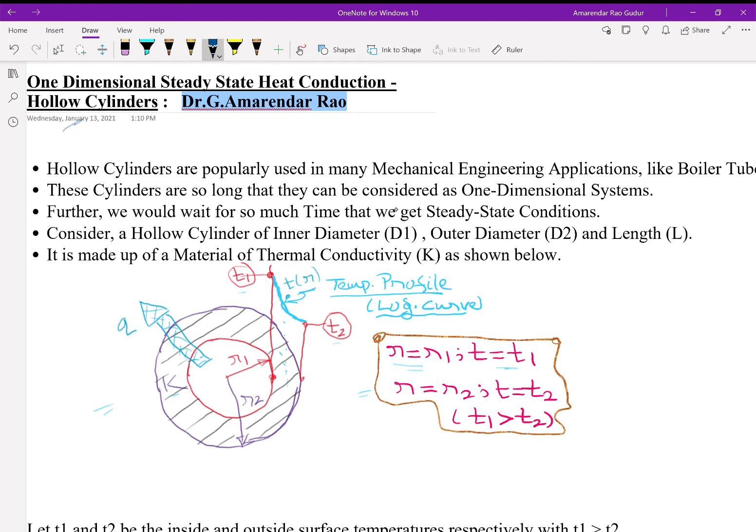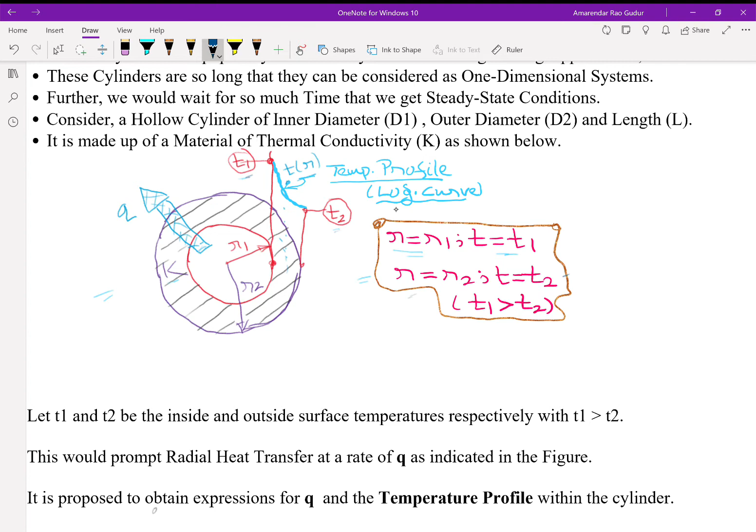Then, in order to have the heat transfer, we assume that the inner surface is maintained at some temperature T1, while the outer one is at some temperature T2, with T1 greater than T2. Mathematically, at R equal to R1, T is equal to T1. At R equal to R2, T is equal to T2, with T1 greater than T2.

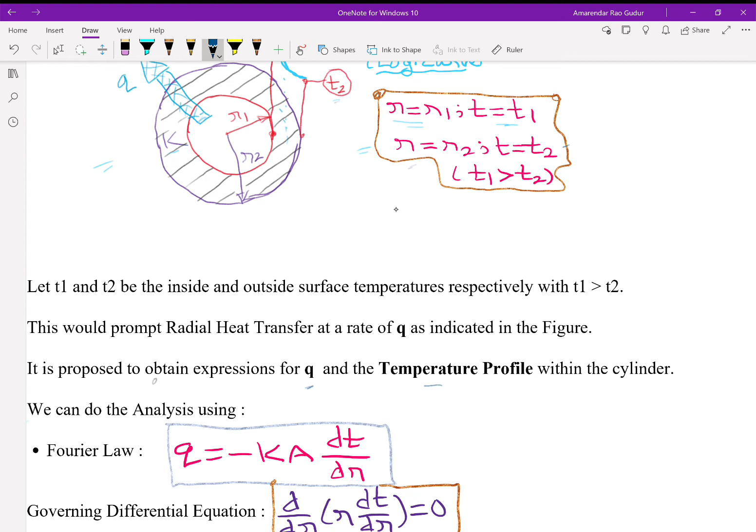Now we intend to get the expressions for heat transfer rate and the temperature profile within the cylinder, and we can carry out the analysis by two popular methods. Method one is we adopt the Fourier law, which for a radial system is given by Q equals minus KA dt by dr.

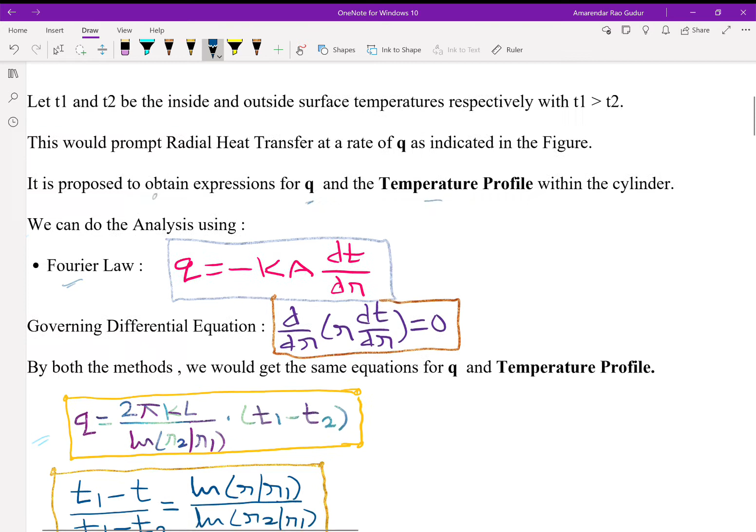Or we can pick up the governing differential equation for cylinders, which becomes d by dr of r dt by dr equal to 0. By both these methods, we get similar expressions for both heat transfer rate and temperature distribution. We realize that the heat transfer rate is given by 2 pi kL over log R2 by R1, times T1 minus T2.

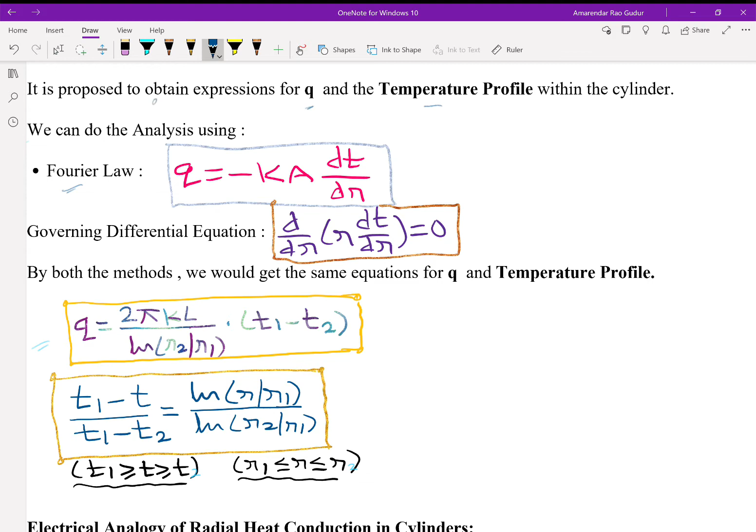And the temperature profile is given by T1 minus T by T1 minus T2 equals natural logarithm of R by R1 divided by natural logarithm of R2 by R1. We notice that on the left hand side T1 is highest and T2 is lowest, whereas on the right hand side R1 is lowest and R2 is highest. Both these equations give us the required output of heat transfer rate and temperature distribution.

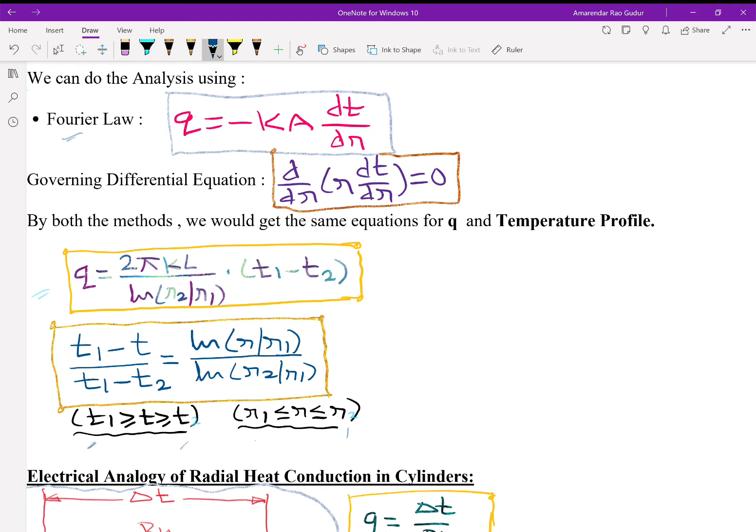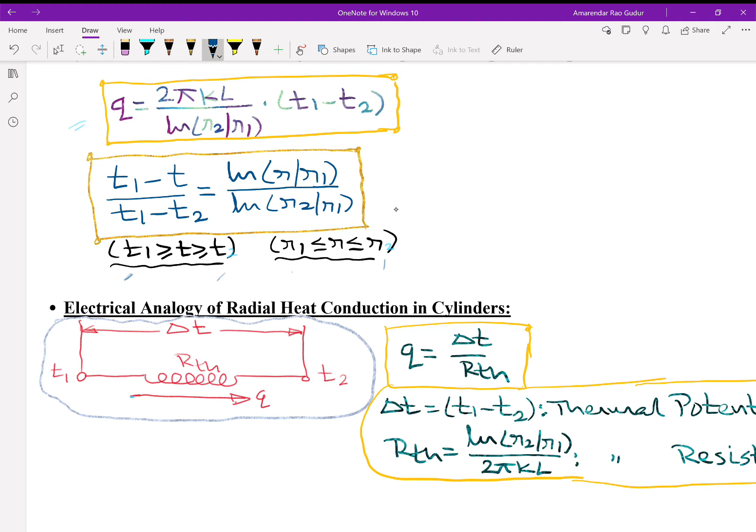Now we can carry out the analysis using the powerful electrical analogy, wherein the given hollow cylinder is replaced by an analog circuit with left side at T1 high potential, right side at T2 low potential, and the difference between T1 and T2 we call thermal potential, responsible for the heat transfer. The heat transfer rate is hampered by thermal resistance RTH, and Q equals delta T by RTH as per Ohm's law.

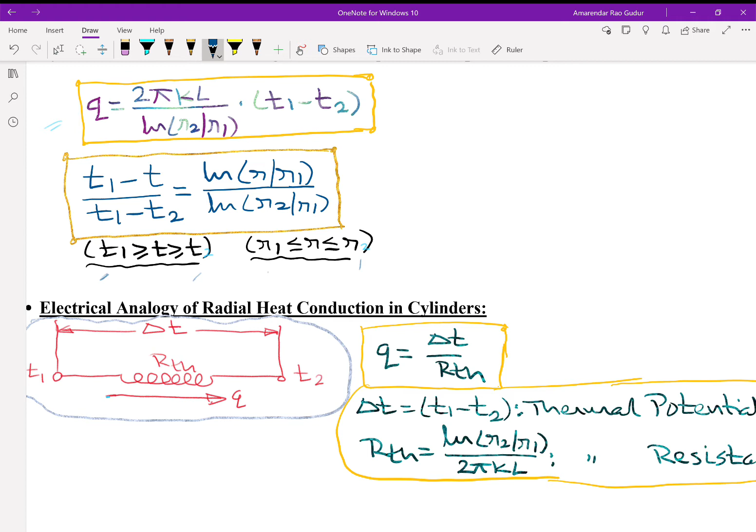By looking at this equation and the conventional equation, we realize that thermal resistance is given by log R2 by R1, divided by 2 pi KL. And whenever length is not given, we take it as 1 meter.

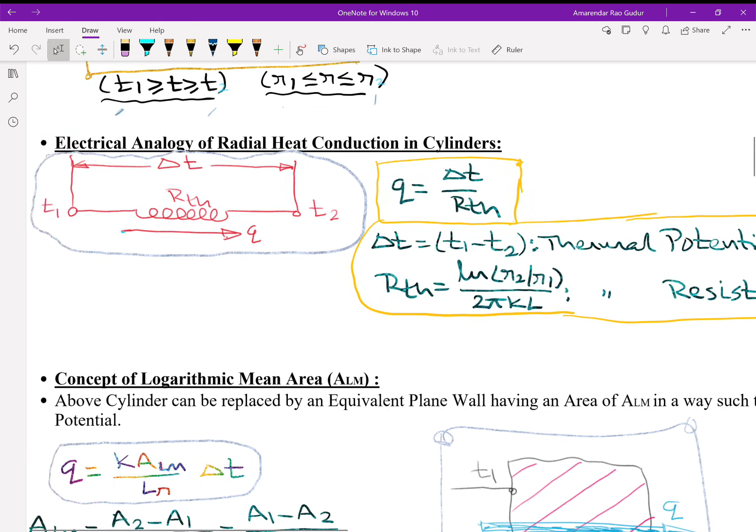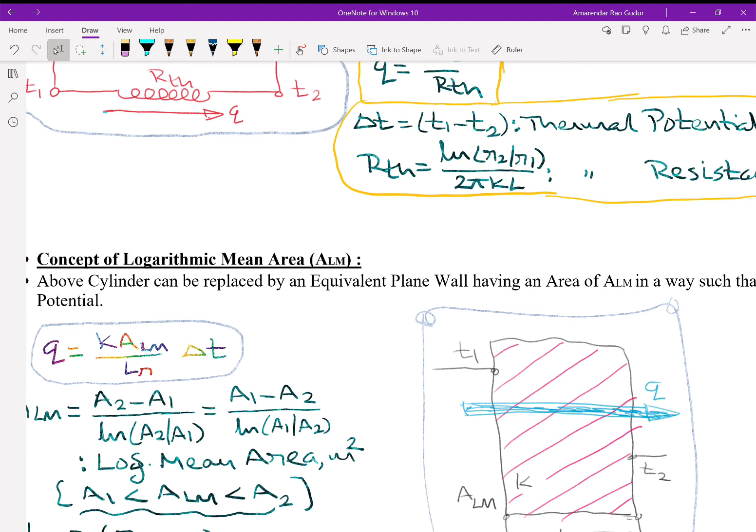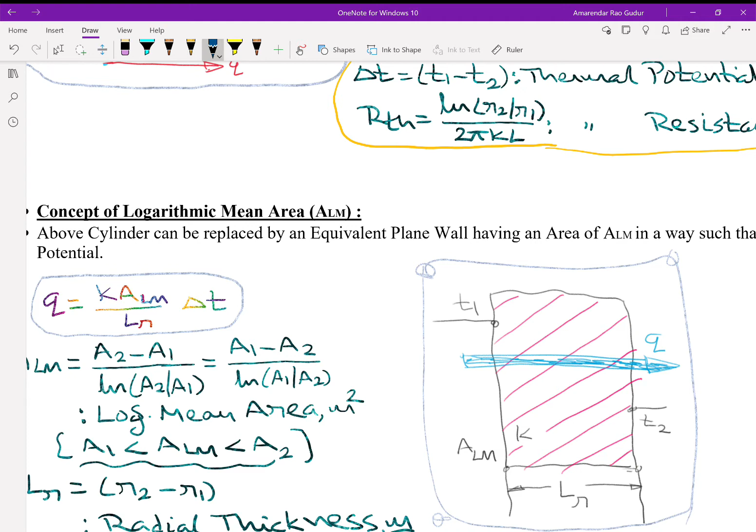Since the cylinder has various areas, inside area is A1 equal to 2 pi R1L, outside area is A2 equal to 2 pi R2L, we can think about something called logarithmic mean area, ALM. In this concept, the cylinder is replaced by an equivalent plane wall having an area of ALM normal to the direction of heat transfer.

Remaining things are same material, same potential, same heat transfer rate. The cylinder thickness is represented by LR, which we call the radial thickness in meters. We can write the expression for Q in a similar way as that of a plane wall. We know that in a plane wall, Q is given by KA by L, times delta T.

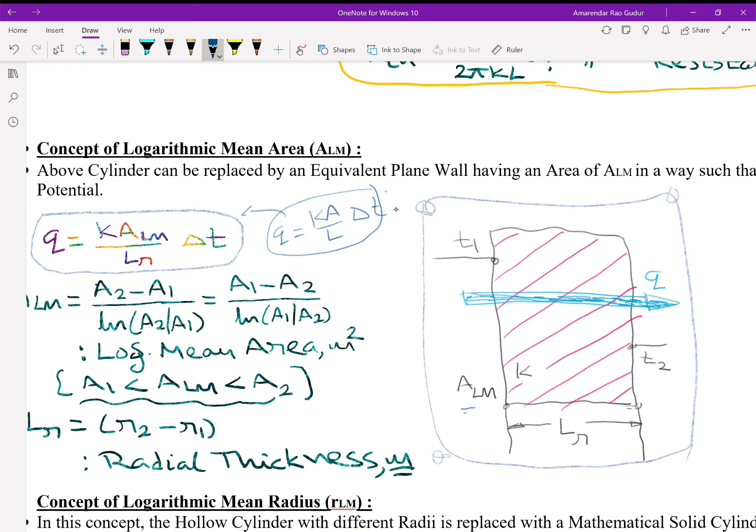The analogous equation we write, only the change is that A is replaced by ALM and L is replaced by LR. By a simple mathematical procedure, we can show that this logarithmic mean area is given by A2 minus A1 over log A2 by A1, or A1 minus A2 over log A1 by A2.

Both equations are perfectly correct. If you use the first part of the equation, A2 is greater than A1, so the numerator is positive, and A2 by A1 is greater than 1. Log of anything greater than 1 is positive, so positive by positive you get a positive mean area.

If you use the second part of the equation, A1 is less than A2, so A1 minus A2 is negative, and A1 by A2 is less than 1. Log of anything less than 1 is negative, so negative by negative is positive. Again we are comfortable, so you can say one area minus the other area, divided by log of first area by second area.

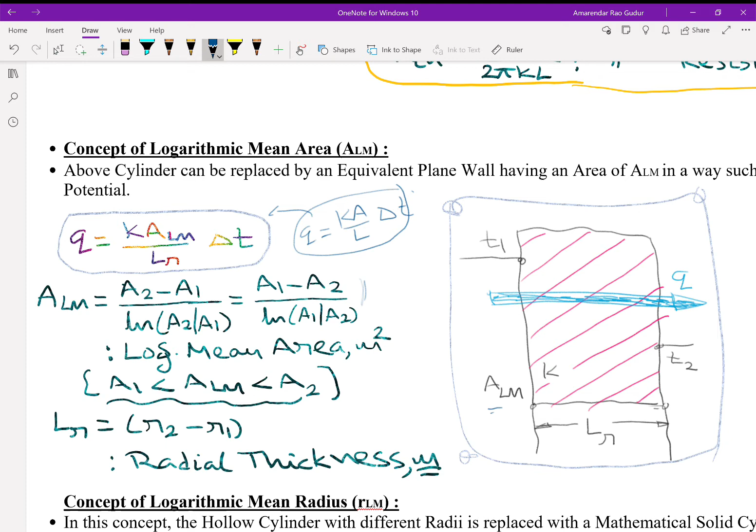Then we can always show that log mean area will be more than A1, less than A2. LR, as I was telling, is R2 minus R1, the radial thickness. So this log mean area concept enables us to write the expression for heat transfer rate analogous to that of a plane wall.

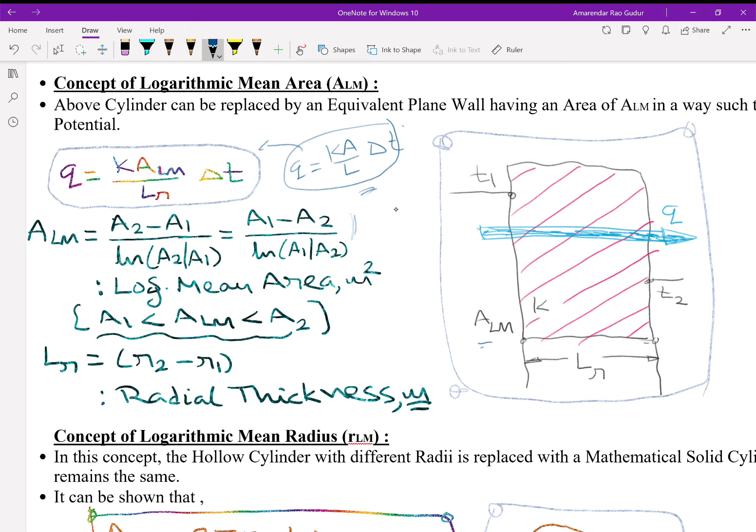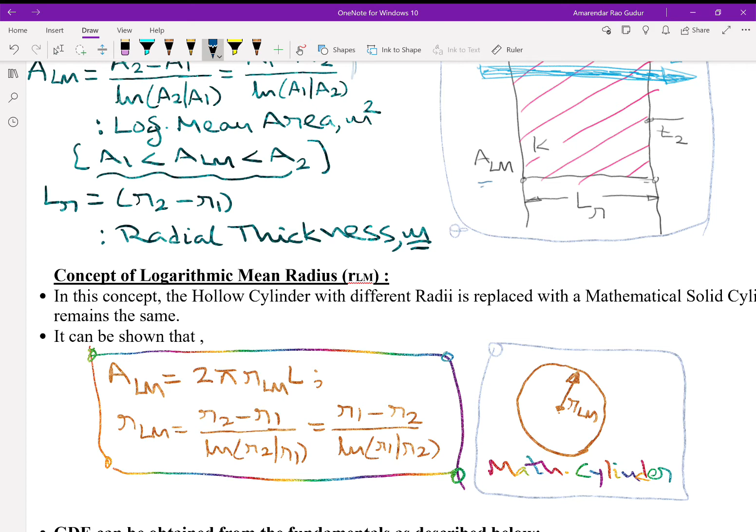Then we can always think about the concept of log mean radius, RLM. In this concept, the hollow cylinder with different radii will be replaced by a mathematical solid cylinder having the radius RLM, in a way such that everything remains the same. This is the mathematical cylinder having a radius of RLM.

Then we can write ALM, log mean area, as 2 pi RLM L, where RLM is simply R2 minus R1 by log of R2 by R1, or R1 minus R2 by log of R1 by R2. And we can always show that R1 is less than RLM, which is less than R2. So it's the mean of R1 and R2.

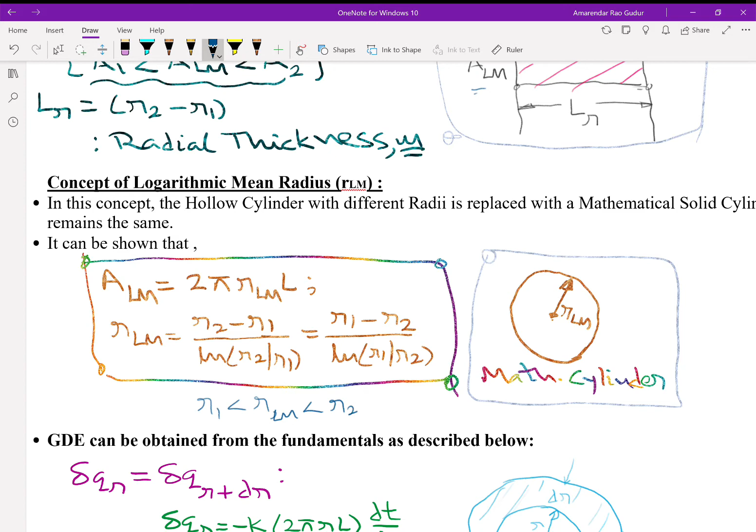Then we can carry out the analysis using the governing differential equation, obtained from the fundamentals, wherein we consider a cylindrical strip at any radius r having thickness dr. Del qr is the rate of energy coming in, and del qr plus dr is the rate of energy going out. For this strip to be in steady state, energy coming in should equal energy going out, the energy balance equation.

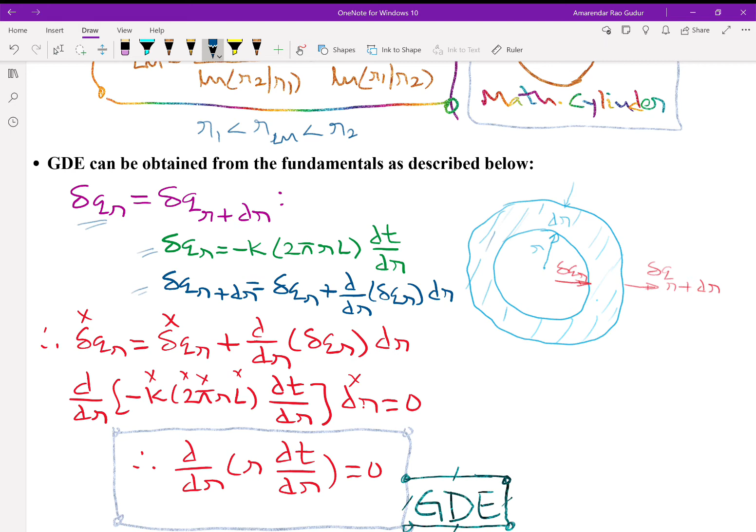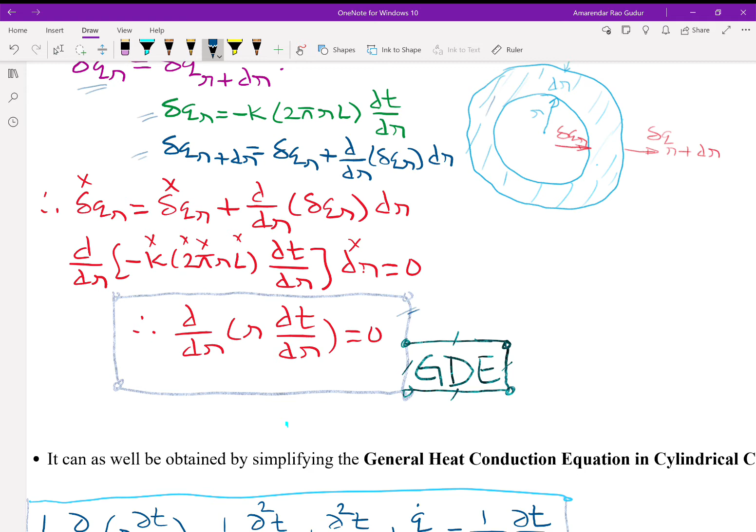Energy coming in can be found using Fourier's law. Energy going out can be written in terms of energy coming in using Taylor series. When we combine both these equations, we get the necessary governing differential equation, which can be integrated twice with appropriate boundary conditions to get the temperature distribution, followed by the heat transfer rate.

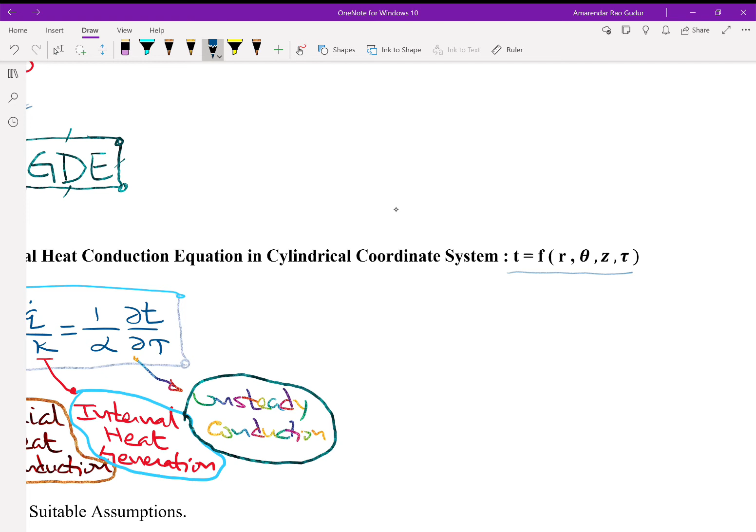The governing differential equation can also be obtained by simplifying the general heat conduction equation in a cylindrical coordinate system, wherein temperature is a function of r, theta, z and tau, where r is the radial coordinate, theta is the angular coordinate, z is the axial coordinate and tau is the time.

We will derive this equation in the forthcoming sessions. The general heat conduction equation in a cylindrical system, for a material that is isotropic and homogeneous, is given by 1 by r del by del r of r del t by del r, plus 1 by r square del square t by del theta square, plus del square t by del z square, plus q dot by k, equal to 1 by alpha del t by del tau.

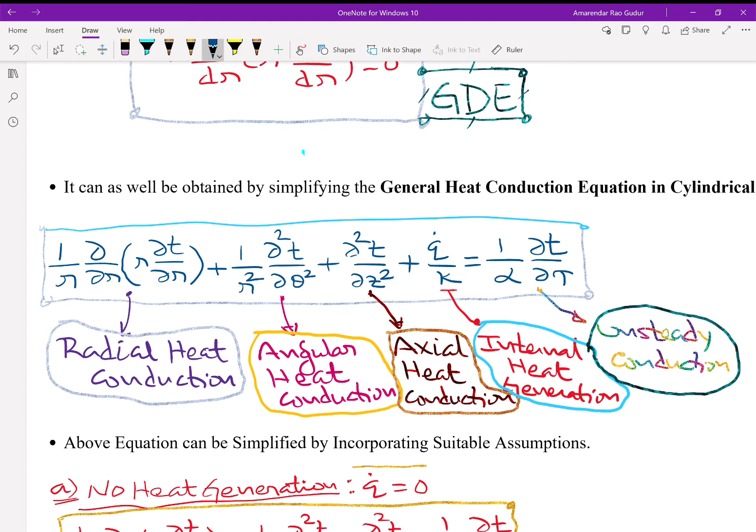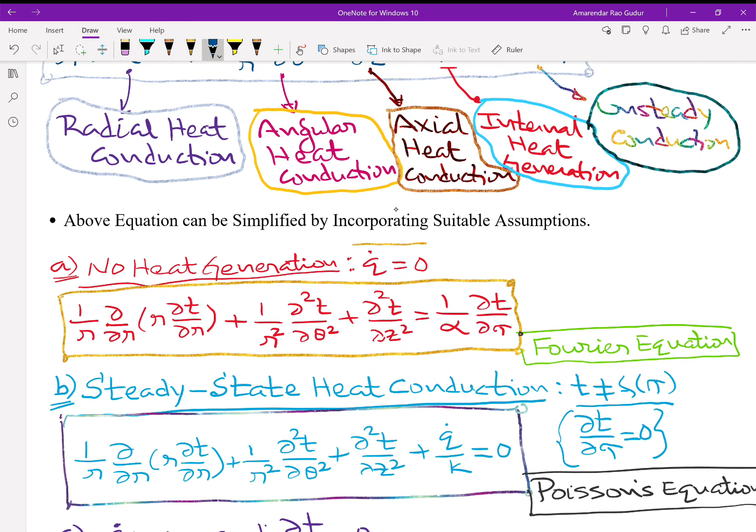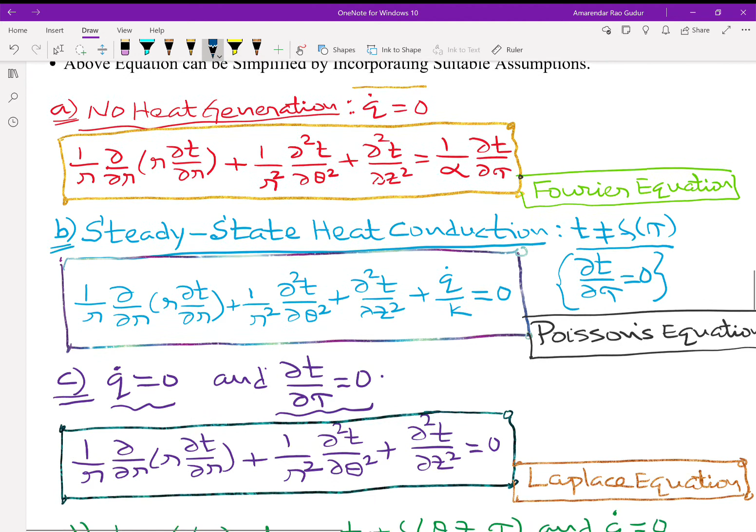We can simplify this equation with suitable assumptions. If there is no heat generation, the fourth term vanishes, giving us the equation named after Fourier. If it's steady state heat transfer, the RHS is zero, giving the Poisson's equation. Combining both conditions, no heat generation and steady state, the first three terms equal zero, giving the Laplace equation.

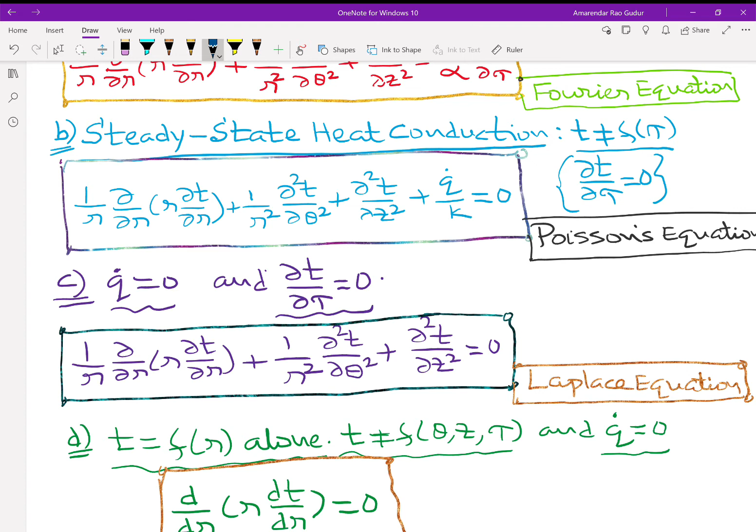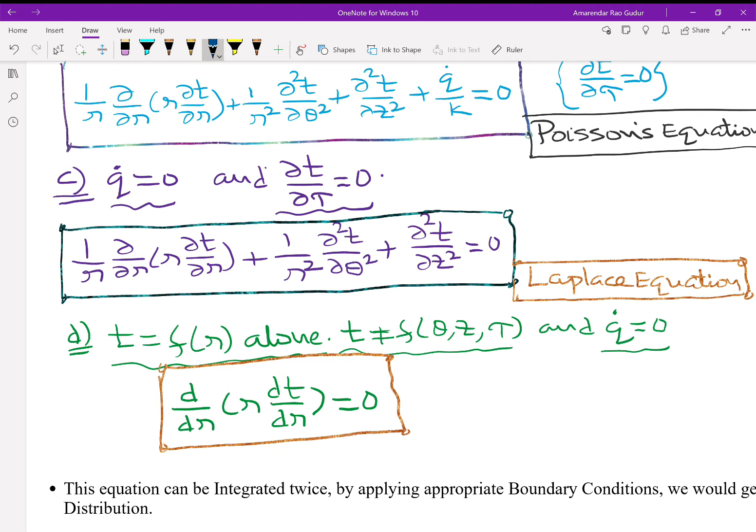Since temperature is a function of R alone, del can be replaced by d: d by dr of r dt by dr equals zero. This is the same as the governing differential equation obtained from the basics, and this equation can be integrated twice to get the temperature distribution followed by the heat transfer rate.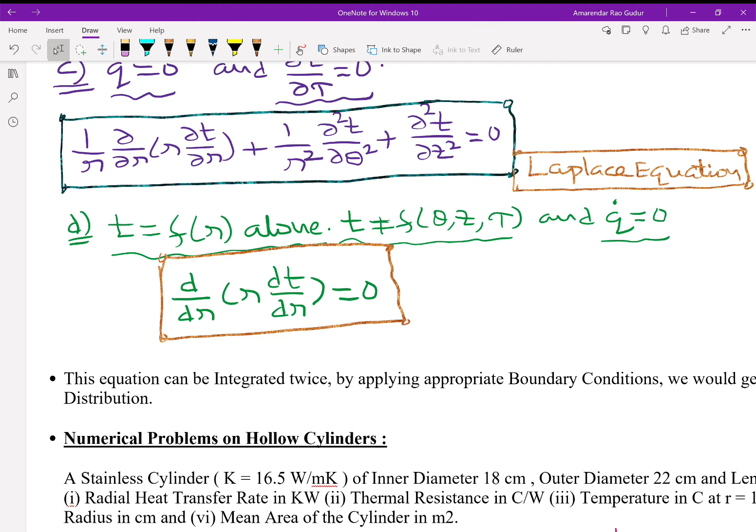These are all some of the important concepts related to hollow cylinders. Now let's try to pick up some numericals. The first one is a very general problem involving all the calculations.

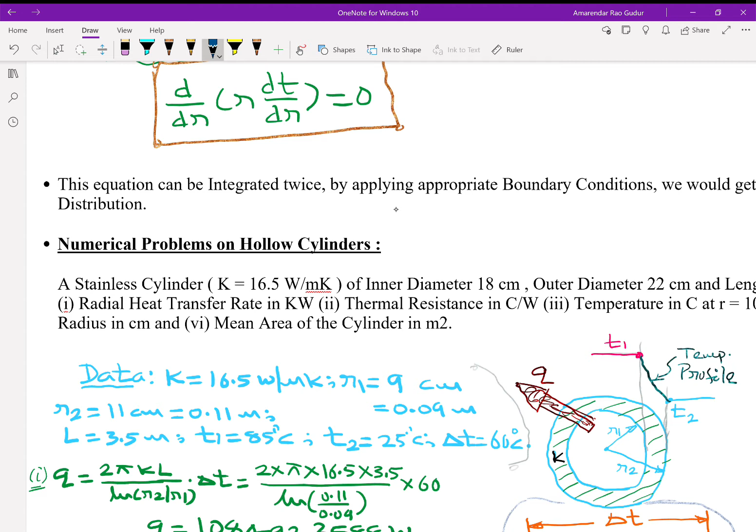A stainless steel cylinder, K equal to 16.5 watts per meter Kelvin, of inner diameter 18 centimeters, outer diameter 22 centimeters, and length 3.5 meters, has its inner surface at 85 degrees centigrade and outer surface at 25 degrees centigrade.

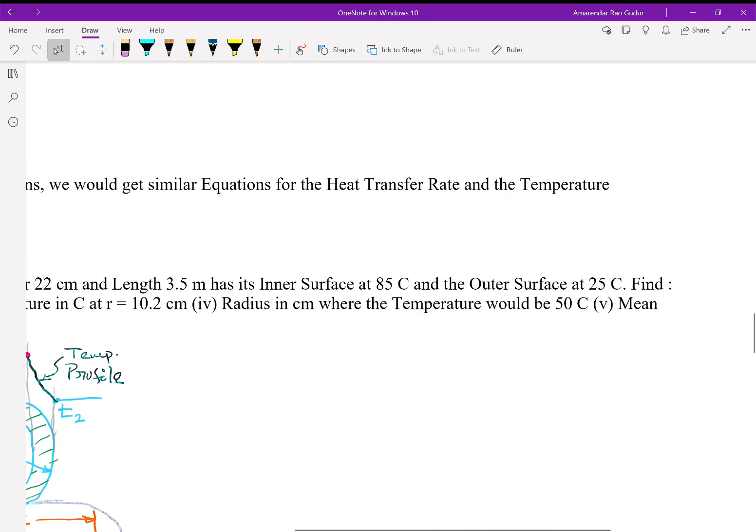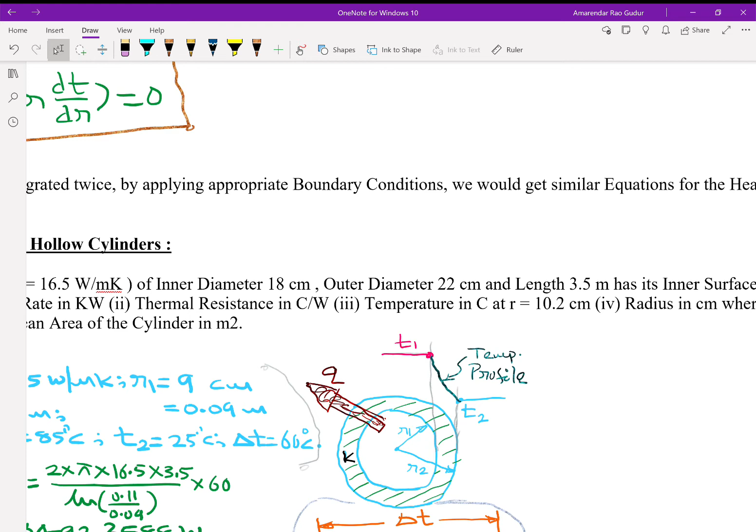Find number 1, the radial heat transfer rate in kilowatts; number 2, thermal resistance in degrees centigrade per watt; number 3, temperature in degrees centigrade at R equal to 10.2 centimeters; number 4, radius in centimeters where the temperature would be 50 degrees centigrade; number 5, mean radius of the cylinder in centimeters; and last one, mean area of the cylinder in meters square.

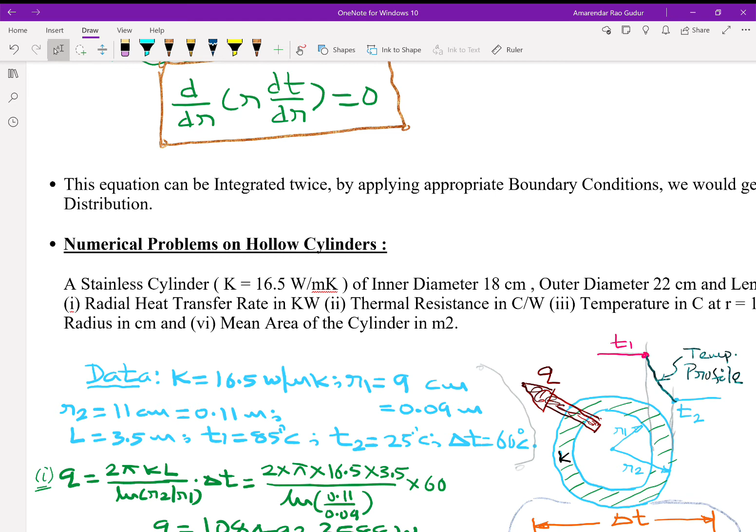If you jot down the data, for stainless steel K is 16.5, already given. Then we have inner radius 9 centimeters, diameter by 2 by 100, that's 0.09 meters. Outer radius is outer diameter by 2, 11 centimeters divided by 100, 0.11 meters. Length is 3.5 meters. Inner surface temperature 85, outer surface temperature 25. Take the difference, it's going to be 60. There is a thermal potential, and this diagram illustrates the entire data available to us.

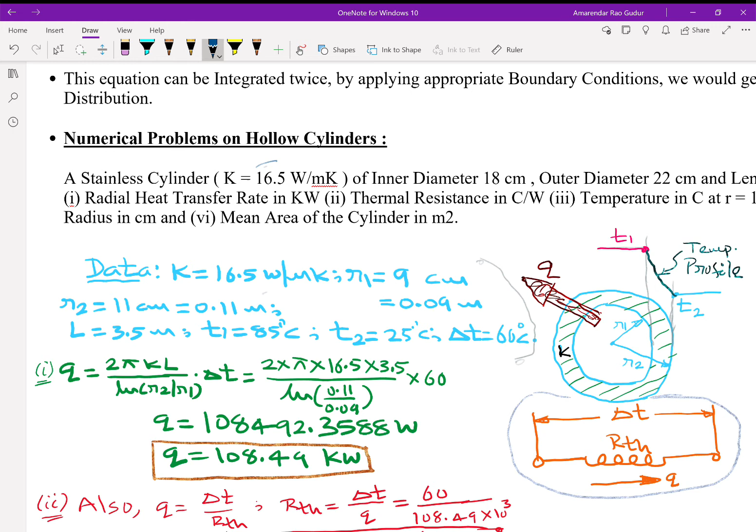Then we have the formula for Q: it is 2 pi K L by log R2 by R1 into delta T. If you substitute the entire data over here, we are going to get Q as 1,08,492.3588 watts. If we divide by 1000, 108.49 kilowatts.

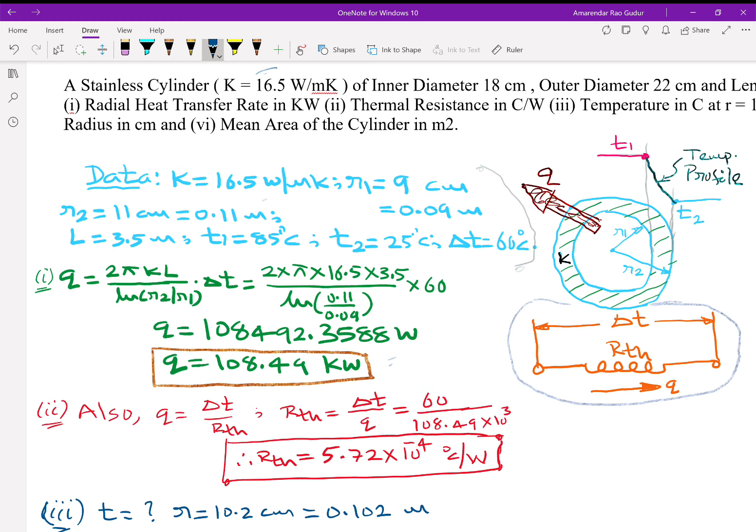Then also we can write Q as delta T by RTH. Q is available, delta T is available. You can find RTH as delta T by Q, which is going to be 5.72 into 10 power minus 4 degrees centigrade per watt. Then we can find temperature at the given location of 10.2 centimeters.

It's 0.102 meters. By using the formula of temperature distribution, T1, T2 are given, R1, R2 are given, R is given, you are trying to find T, which is going to be 47.57 degrees centigrade.

And we would like to look at the place where temperature is 50 degrees centigrade. Using the same equation, we have to find R, T is given, which is going to be 10.117 centimeters.

Then RLM as per the formula is R2 minus R1 by log R2 by R1. If you calculate, it's going to be 0.0996 meters. Into 100, it's going to be 9.96 centimeters.

That's the mean radius. Mean area is A2 minus A1 by log A2 by A1, or A1 minus A2 by log A1 by A2, or 2 pi RLM L. All of them are okay. Since RLM is available, this formula would be more effective, and if you substitute for RLM, L is given, it's going to be 2.19 square meters.

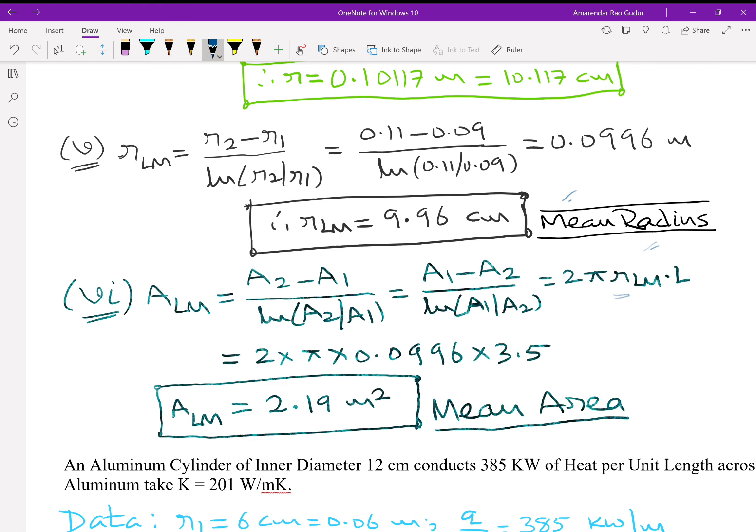So this is a general problem involving all the basic calculations.

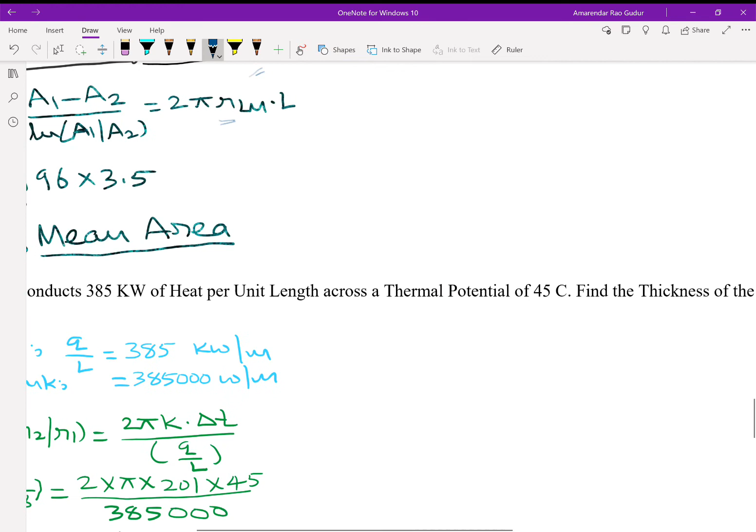Next problem is a one-step problem, wherein we have an aluminum cylinder of inner diameter 12 centimeters, conducts 385 kilowatts of heat per unit length across a thermal potential of 45 degrees centigrade. Find the thickness of the cylinder in millimeters. For aluminum, we can take K as 201.

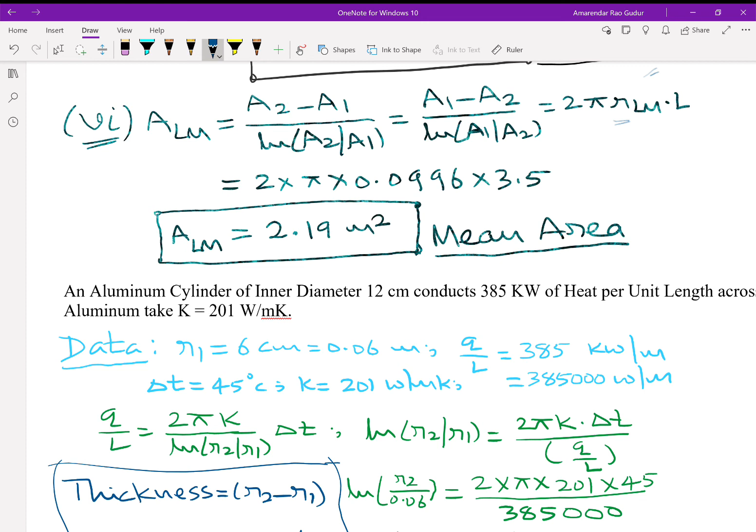So if we jot down the data, R1 is 6 centimeters, 0.06 meters. Heat transfer rate per unit length, Q by L, is given 385 kilowatts per meter. Multiply by 1000, 3,85,000 watts per meter. Potential is 45 degrees centigrade, K is 201. If you substitute this data in the standard equation, Q by L is 2 pi K log R2 by R1 delta T.

Only unknown is R2, that can be worked out from this equation as 0.0695 meters. Thickness is R2 minus R1, so 0.0695 minus 0.06, it's going to be 9.954 into 10 power minus 3 meters. If you multiply by 1000, you are going to get almost 10 mm, that is 9.954 mm.

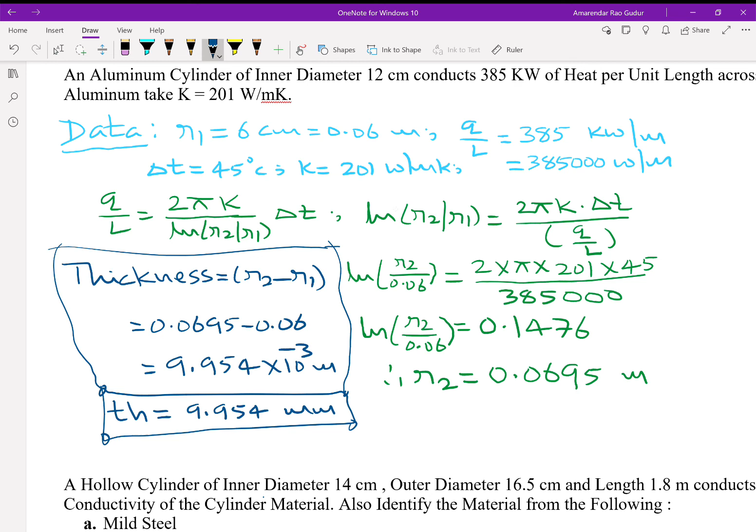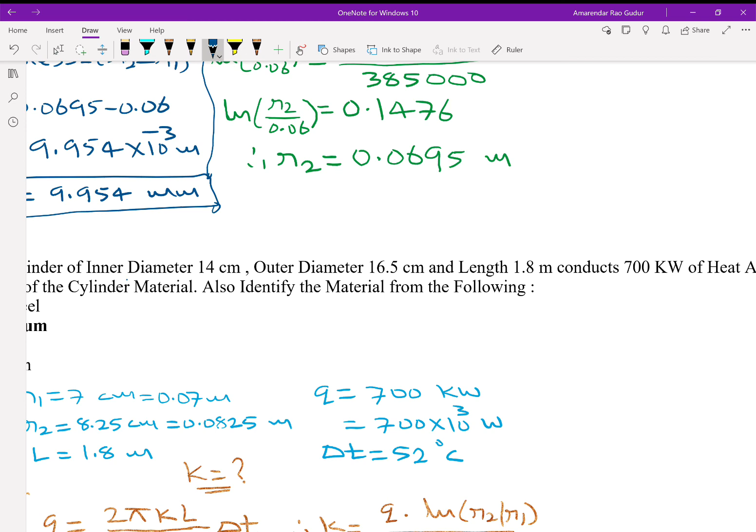Then we look at another problem. A hollow cylinder of ID 14 centimeters, OD 16.5 centimeters, length 1.8 meters, conducts 700 kilowatts of heat across a thermal potential of 52 degrees centigrade. Find the thermal conductivity of the cylinder material. Also identify the material from the following options: A. Mild steel, B. Aluminium, C.

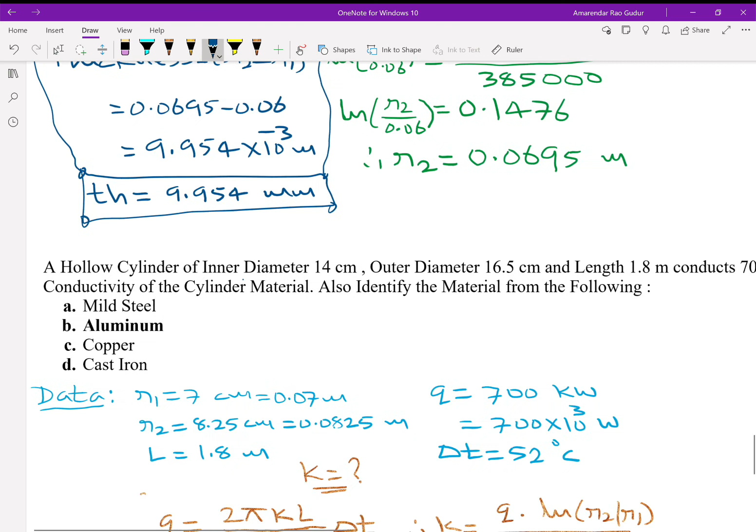Copper, D. Cast iron. Again here only one unknown, because R1 is given 7 centimeters, 0.07. R2 is given 8.25 centimeters, 0.0825. Q is 700 kilowatts, 700,000 watts. Length is 1.8 meters, delta T 52 degrees centigrade.

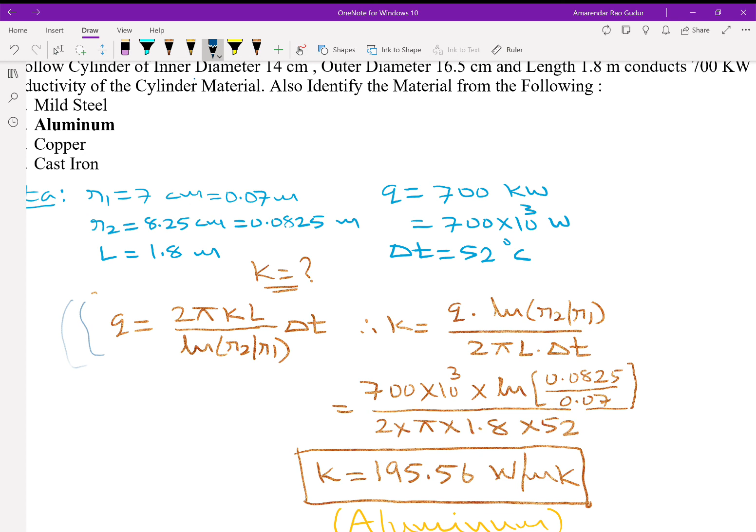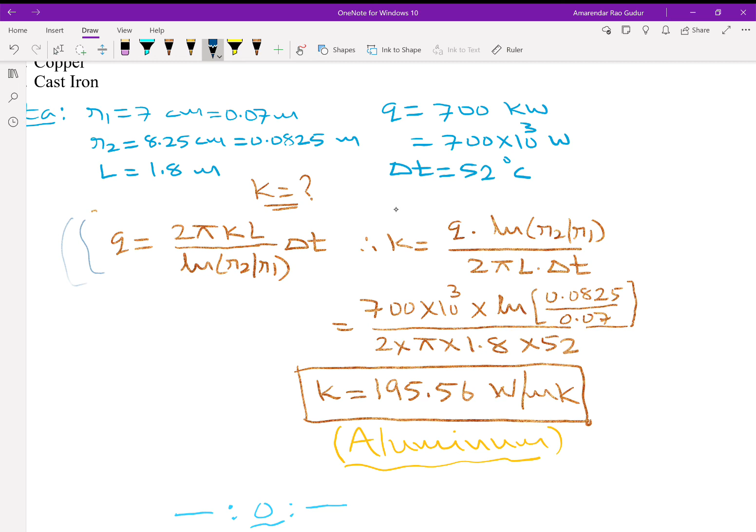Q is given by this equation, 2 pi K L by log R2 by R1, delta T. If you work out for K, it's going to be Q times log R2 by R1, by 2 pi L delta T. If you substitute the entire data, K is going to be 195.56 watts per meter Kelvin, very close to 200. Therefore, the material is going to be aluminium.

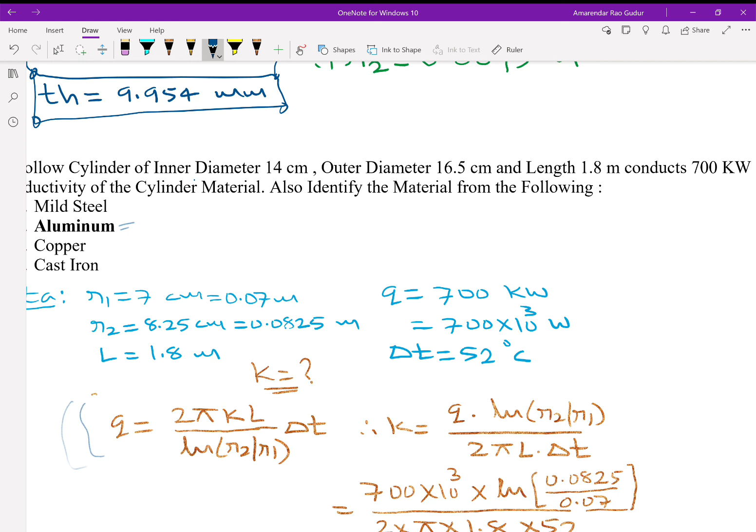So these are some of the problems which may be useful to you in any of the examinations. In the next session, we'll be talking about hollow spheres. Till that time, have a nice time.